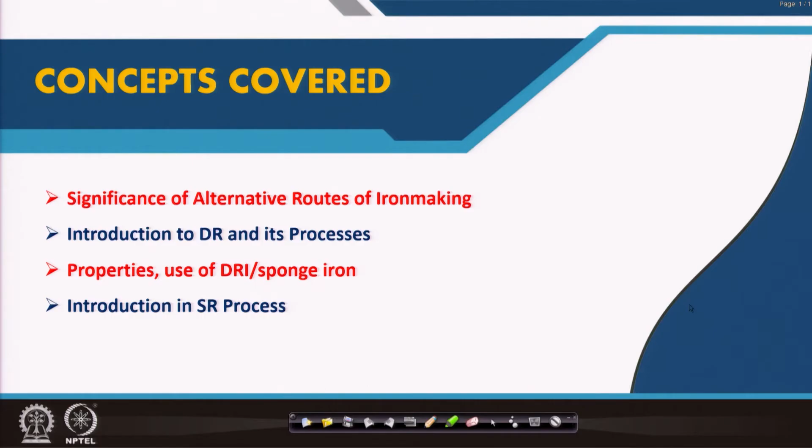Now, this is what I want to cover in this lecture. First of all is the significance of the alternative routes of iron making. That means, what is the need of these alternative routes of iron making today. So, that has to be discussed first, and then I will give an introduction to DR and its processes, then properties and use of DRI or sponge iron, and then I will go to the introduction to the smelting reduction process.

Now, what are the driving forces for alternative routes of iron making today? First is the coke-free process. So alternative routes of iron making should be coke-free. As I said, coke constitutes more than 50% of the total cost of liquid or hot metal production. And it is due to the fact that we are depleted in coking coal reserves. We have very limited coking coal reserves, and that coking coal has another problem of high ash content. So, we are dependent on importing coking coal, and then we make the coke in India.

We mostly depend on import of coking coal from Australia, and then of course we blend it with non-coking coal or other medium coking coal, and then we charge it into the coke oven, sometimes in the form of stamp charging, as we have discussed already. But still, coke becomes very costly, and as I said, it constitutes around 50% of the total cost of hot metal production. Besides, the coke making process itself is very polluting, and that's why from an environmental point of view it is also not good.

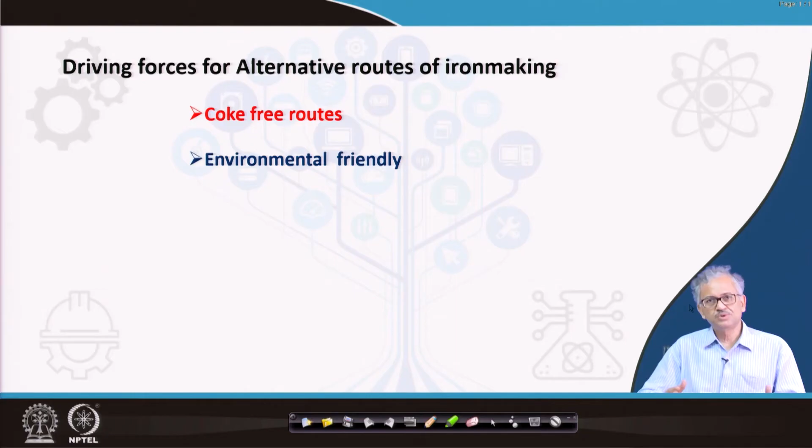So, people are looking for a process which can be without coke, using the non-coking coal that is prevalent in India in a large amount. So this is the first. Second is the environmentally friendly process. As I said, the blast furnace has ancillaries like the coke oven plant and the sinter plant. Both are polluting plants. So, we have to look for routes of iron making that are coke free, as well as where you do not require sinter. You can directly use the fines. If we can get rid of these coke making and sinter making units, we can produce iron in a very simple system.

Then recycling of the waste, because in the steel plant we generate a lot of waste. For example, in the steel plant we produce EAF dust, which is iron bearing dust, and then blast furnace dust; all are iron bearing dusts that are just wasted, as well as the slime produced during iron ore beneficiation, which contains a lot of iron. So, all this solid waste has to be utilized, because today's practice should be a zero waste process. So, recycling of the waste.

You know that we cannot use it in the blast furnace, because the blast furnace is a very complicated chemical reactor. As I repeatedly say, it is a thermally and chemically highly efficient reactor, but to maintain its good efficiency, it requires very good quality blast furnace burden. So burden quality has to be very good in the blast furnace, because of its complexity.

You have a dry zone, and then a wet zone in the bottom of the blast furnace, demarcated by a cohesive zone, and they interact in such a nice way that finally we get the product, hot metal. So for this interaction of the dry, wet and cohesive zones, we need a very good quality iron ore burden that maintains very good permeability in the blast furnace, such that the counter current gas-solid-liquid flow is not hampered. The gas comes from the bottom and interacts with the liquid and then the solid, so this is a counter current gas-liquid and gas-solid reactor.

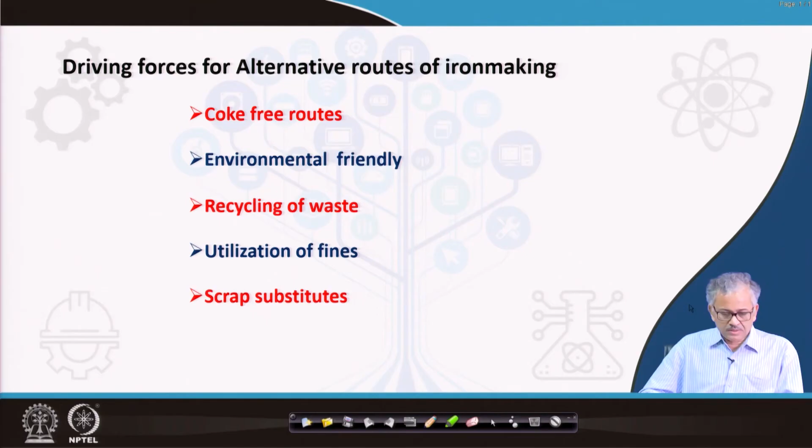So we have to substitute the scrap by some other forms of solid metallics. Okay, so that is another driving force for the alternative routes of iron making. So these are some of the driving forces for alternative routes of iron making. Okay, so now let us see the various methods of iron making.

The conventional iron making process is the blast furnace or the mini blast furnace. Here MBF represents the mini blast furnace, and mini blast furnaces are similar to the blast furnace. Only thing is that here the shaft height is much less compared to that of the blast furnace, because the quality of burden is required to be very high because of the very long shaft, and during the descent of this raw material, they can generate fines and block the pores, choke the shaft. That's why the quality of the burden material becomes more and more important as the shaft height increases.

If I decrease the shaft height, then I can compromise to some extent with the quality of the burden. That's why the mini blast furnace came, where you can charge more lumpy ore; low quality raw material also you can use in the MBF. So especially for small production, you can use the mini blast furnace. For example, Tata Metaliks has a mini blast furnace in Kharagpur.

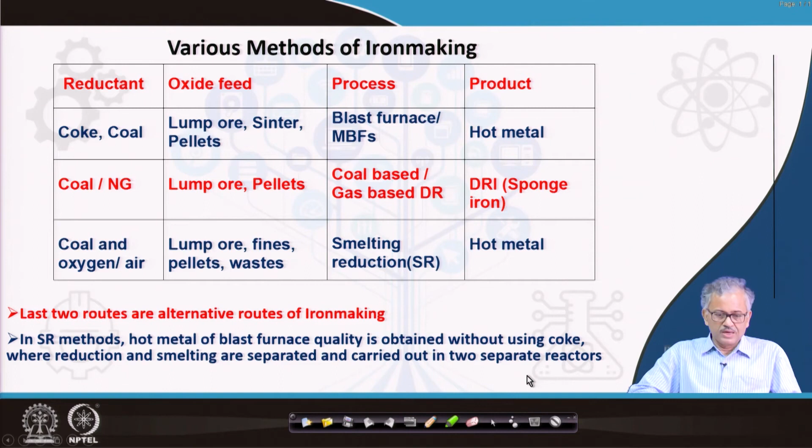So we have removed all types of restriction on the raw material, and we are very flexible with the raw material. That is the advantage. Basically we have changed the reactor, and then we can produce hot metal of similar quality to that of the blast furnace. That is the beauty of this process. In the SR method, hot metal of blast furnace quality is obtained without using coke, where reduction and smelting are separated and carried out in two separate reactors. I think you understand the difference.

Now we talk about the introduction to DR and its processes, that is direct reduction. What is called direct reduction? Direct reduction includes a family of processes in which iron ore in the form of fines, lumpy ore and pellets is converted into solid state iron, using either a solid or gaseous reductant. You can use the fines directly. The reactor is solid state; basically you are reducing the iron ore in the solid state to produce iron.

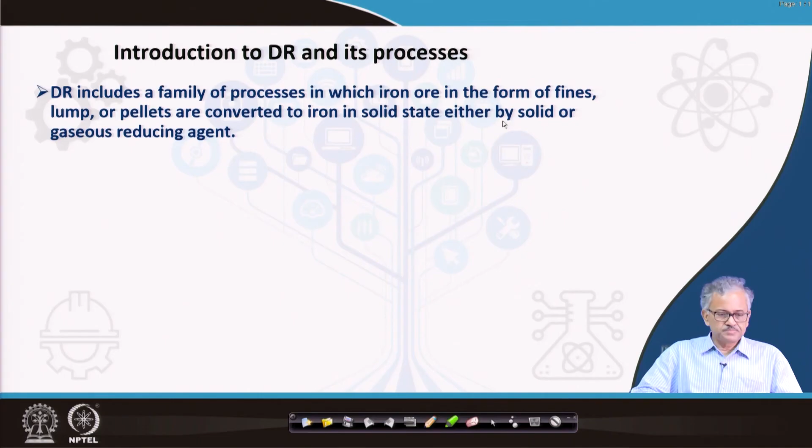And what is the raw material? You can directly use the fines, so the reactor will be different. You can use lump ore, pellets also, and either a solid reductant like non-coking coal or a gaseous reductant like reformed natural gas. This whole family of processes is called the direct reduction process. So non-coking coal and reformed natural gas are used as reductant. Instead of coking coal, you can directly use non-coking coal, and in the solid state you can produce metallized iron.

And this non-coking coal and reformed natural gas, they are basically the source of energy also. There is no other energy source. The non-coking coal is the source of energy, as well as it acts as a reductant. Similarly, natural gas acts as a source of energy, as well as reformed natural gas acts as a reductant. And you can burn some amount of the natural gas to produce the energy to sustain the process.

So, the final product of the DR process is solid iron. As I said, in the solid state we are reducing it, and it is solid iron. So, finally, the task that is remaining is to melt it. That also involves some energy; that limitation is there. So, from the direct reduction process, the product is solid iron, and you have to melt it, that you have to keep in mind. As a result, it requires some more energy in the next step.

What are the products of this DR process? One is the hot DRI. When you are reducing it, you are getting the hot DRI. In hot condition, if you have a provision, you can directly charge it into the electric arc furnace. Then you can save a lot of energy. Or in the HYTEMP process, if you have some provision of channeling the hot DRI directly to an EAF in a distant place, that is also possible. That is called the HYTEMP process.

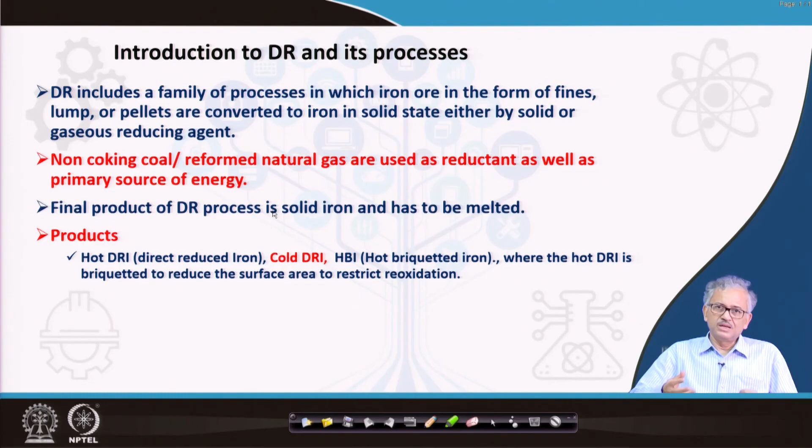Hot briquetted iron: basically the hot DRI is briquetted into a bigger shape. If you do hot briquetting, you are decreasing the surface area. So its propensity for reoxidation will decrease to some extent, because the DRI is very porous. If you briquette it, on the surface you can reduce some amount of pores and decrease the surface area. So its propensity for reoxidation decreases, and besides, the melting efficiency of briquettes is sometimes better. So these are the three products: hot DRI, cold DRI, and hot briquetted iron.

And what reactor do you use for the coal based DR process? Mostly the reactor used is the rotary kiln. It is basically a cylindrical reactor, inclined with the horizontal such that the material can move under gravity under a rotating condition. You burn the coal from the exit, you just give air and coal and burn it. The coal burner generates the heat, and carbon is also used as a reductant. Carbon generates in situ CO and it reduces the iron ore by taking the heat from the furnace atmosphere. So this is the process in the rotary kiln.

And for gas based processes, you have different reactors. One is the fluidized bed reactor, where you can directly use the fines, and you can use gasified coal, the CO gas after coal gasification, or reformed natural gas from the bottom, and the fines can be fluidized and reduced. This is called the fluidized bed.

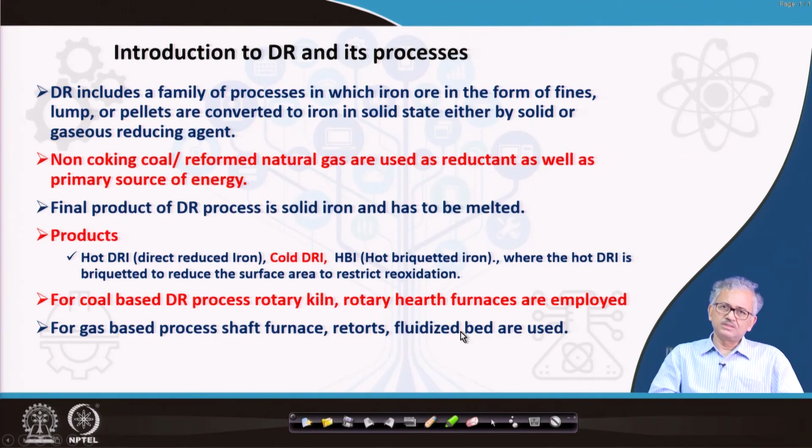So the tunnel kiln is that kind of retort, and the fluidized bed reactor is there, and the shaft furnace is there. Most of the modern DR processes like Midrex and HYL are shaft furnace based processes, and some fluidized bed processes are also in place. And the retort process is basically the tunnel kiln.

In the tunnel kiln, basically in a retort, the material is kept in a cylindrical retort, and it is heated from the side. Okay. A lot of retorts are there, and these retorts move through the tunnel where the heating arrangement is there by the burners. Heat penetrates through the retort from the surface, the material gets reduced, and you take it out. So a number of retorts are arranged in the car, and that car moves.

The total global production is around 100 million tons of DRI, out of which India produces around 28 to 30 million tons, and it is still today the leading producer of DRI.

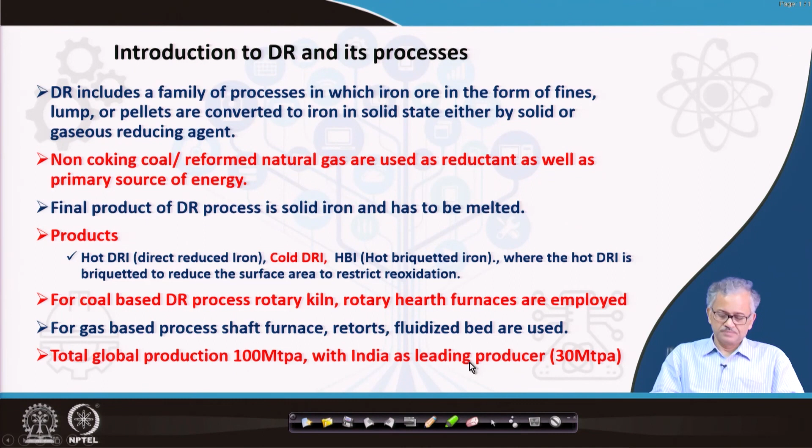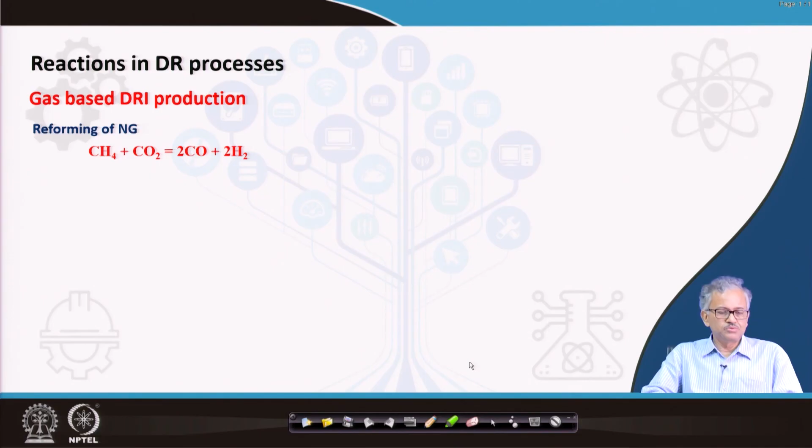So now what are the reactions involved in the DR process, the gas based process? First you reform the natural gas. You can reform CH4 using CO2, and then you get CO and H2. It is called CO2 reforming. The idea is that the off gas from the reduction shaft can be directly used for the CO2 reforming process.

Or you can reform the natural gas using steam, and then produce CO and H2. All these reforming processes are endothermic, so heat has to be supplied. This is called steam reforming. Okay. Basically you are oxidizing the methane to CO and H2, and the question is what is the source of oxygen. You can use CO2 as a source of oxygen, or you can use simple steam as a source of oxygen.

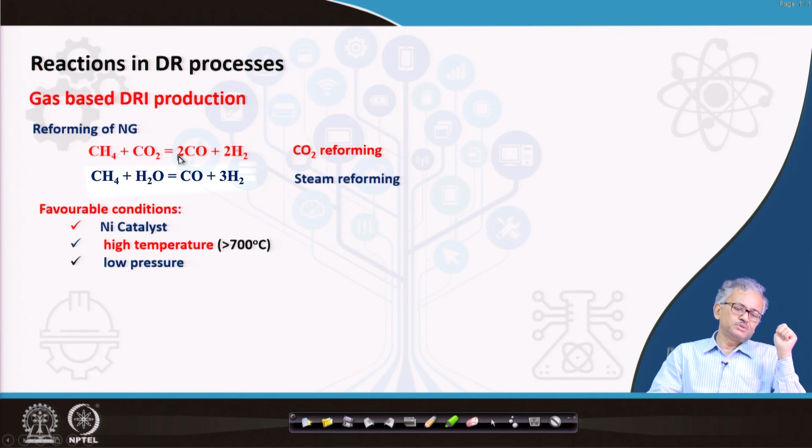Favorable conditions: for all these reforming processes you need a catalyst, otherwise the process is not very fast. The presence of a nickel catalyst makes this process very fast, the temperature is comparatively higher, greater than 700 degrees centigrade, and you have to use low pressure. In this reaction, 4 gaseous moles are produced out of 2 moles of gaseous reactant, so the pressure will increase.

So at low pressure this reaction will move in the forward direction. And the reduction is basically Fe2O3 with hydrogen forming Fe and H2O. It can also be reduced by CO. So this is the overall reaction.

In the coal based process, the reductant gas is generated by the carbon gasification reaction. You are well familiar with it. Carbon is gasified by CO2 to CO, and this CO is used for the reduction of Fe2O3 to iron in three sequential steps: hematite to magnetite, magnetite to wustite, wustite to iron.

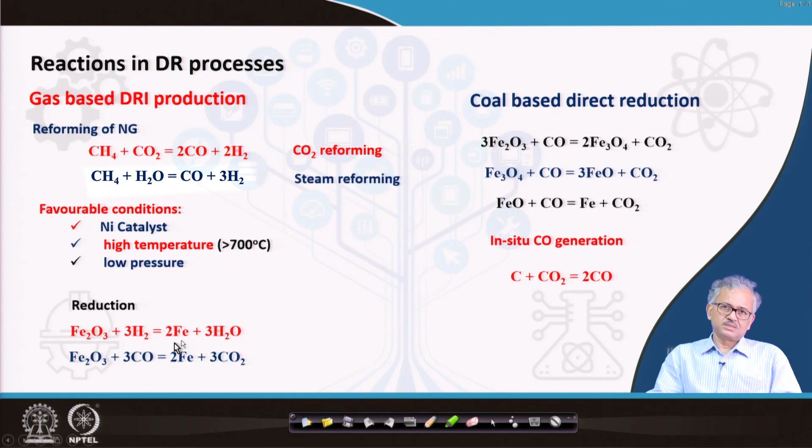It is similar in gaseous reduction also; I am not giving the steps, but these 3 steps are also applicable there. But in the coal based process, the main thing is that we generate CO in situ by gasifying the carbon inside the reactor itself. So the coal based reactor acts both as a carbon gasifier and as a reduction unit.

This process is highly endothermic and requires around 1000 degrees centigrade for appreciable production of CO. Higher temperature is preferable, but because of sticking and agglomeration formation, we do not go to very high temperature. Usually this process is carried out around 1050 degrees centigrade. I'll come to that in detail.

That's why the coal based process is a somewhat higher temperature process compared to the gas based process. The gas based process can be operated within 900 degrees centigrade, but the coal based process has to be around 1050 degrees centigrade.